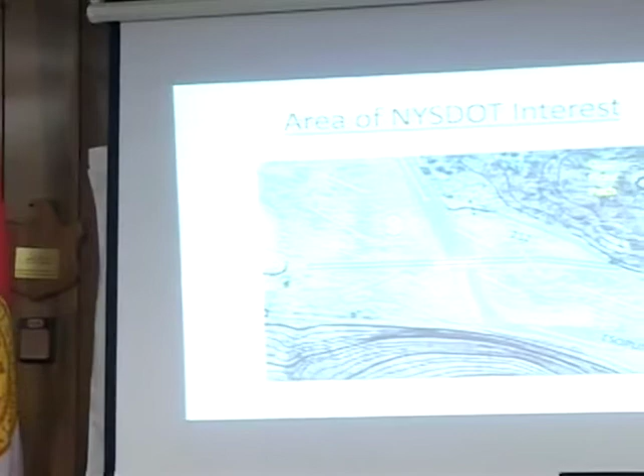So of course, the state is most concerned about the bridge location here. 212 is over here, and the flood control berm is shown in orange, and that's the floodplain map in the hatched area. And at these high flow events, instead of flowing with the river, a lot of the floodplain flows over the berm and over the approach, causing significant damage.

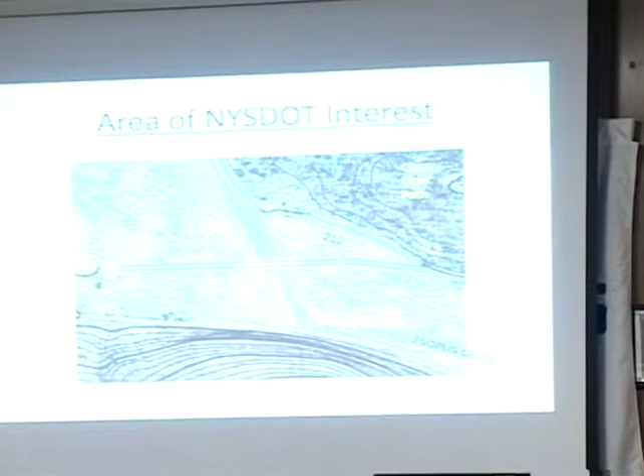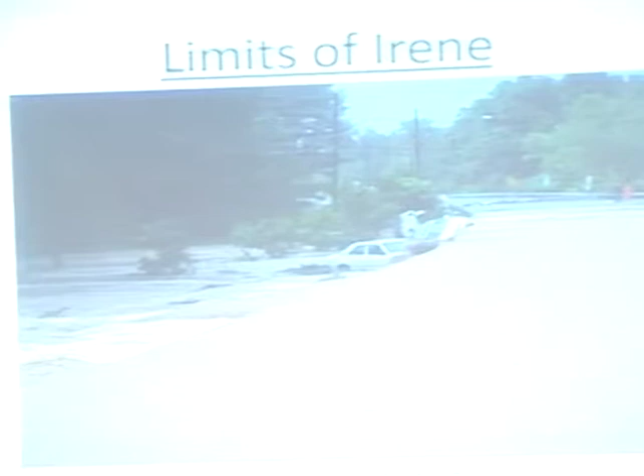During Irene, this is looking towards the bridge from 28 near the cabins property, a little further away from the farm stand. A lot of these pictures were supplied by Aaron Bennett, if you heard. This is looking towards 28 from 212 near the post office.

Looking at the bridge after the peak flow from upstream. Some of these are auto slides apparently. This is an aerial that shows a lot of the devastation up and down.

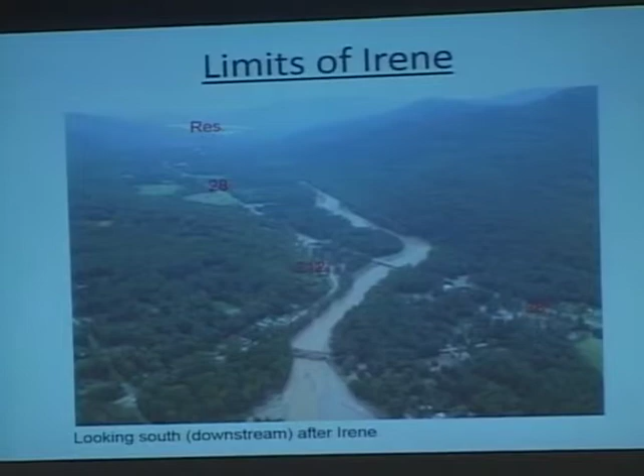Including, and these pictures were all used to help calibrate the hydraulic models. Basically, where there was mud, we knew the water was. And again, looking at the bridge after cleanup and the heavy debris load that was in the creek.

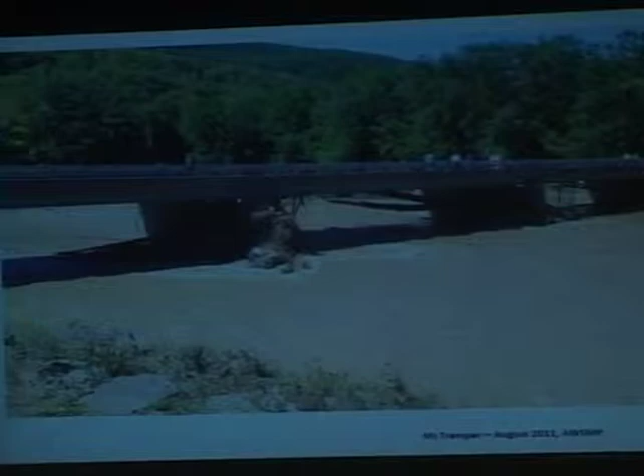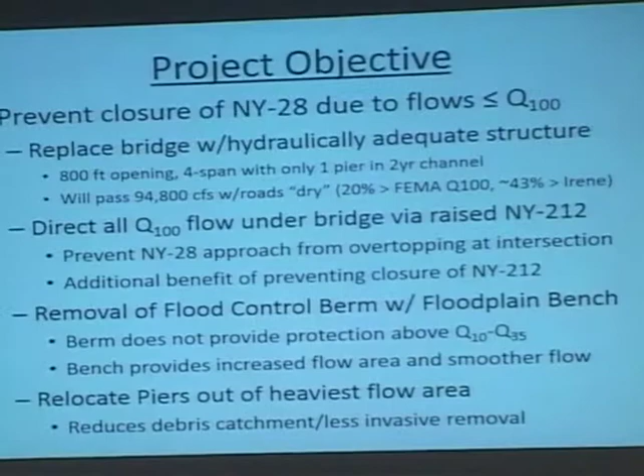So the project objectives, the simplest objective is to keep the bridge and Route 28 open during these high flow events, because it's a critical corridor for people living up in the area to get to and from emergency services. Get the services up there, get down to the Kingston, to the hospital, that sort of thing.

We're going to do that by replacing the bridge with a hydraulically adequate structure, which will be about 800 feet long. It will also have 3 piers, but only one will be in the river channel, located furthest away from where the berm is now, where the flows are slower and there's less debris.

In order to help keep 28 open, we can't have the water spilling onto 212 anymore, because it will still keep coming over the 28 approach. So we're actually going to lift up 212 significantly to impound the water and force it to go under the bridge.

In doing so, that renders the flood berm, which is not adequate for the 100-year storm, somewhat irrelevant. So in order to raise 212, we're going to remove the flood berm and over-excavate the area and use that material to lift up 212.

A lot of the suggestions came from the local flood analysis that was done for the town by Milone & MacBroom, including the over-excavation.

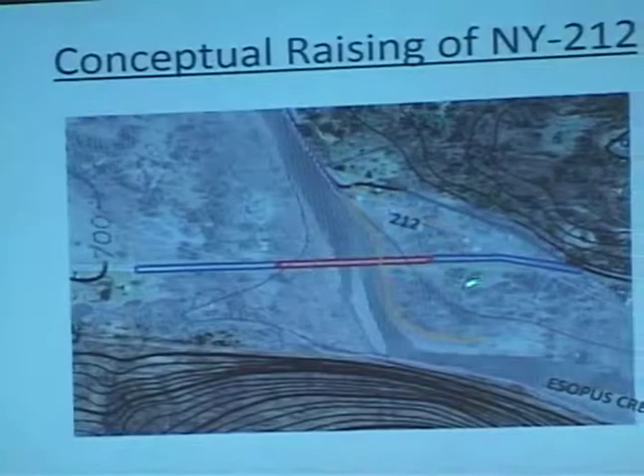So here's the concept raising of 212 and the removal of the flood berm with the wider bridge opening shown. As Rob said, the bridge actually will be just to the downstream of it, not on top.

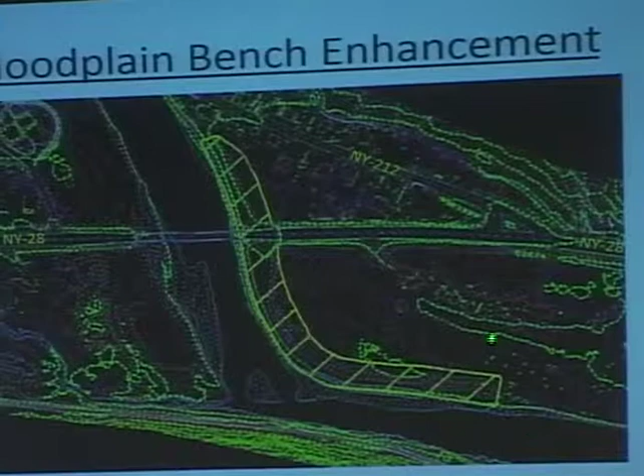Again, here's a view of the berm upstream and downstream. And we're going to remove that all and over-excavate about 200 feet to allow both a higher flow area and less impediments by the removal of the trees, so the water can flow through more smoothly.

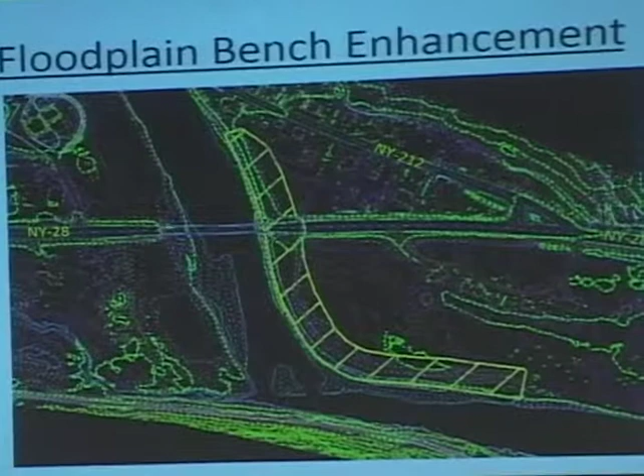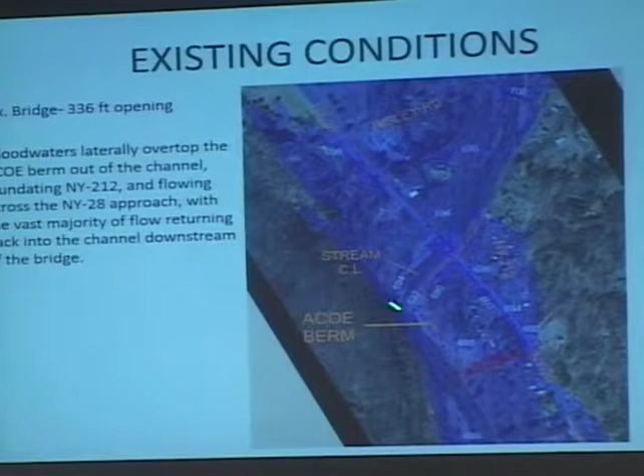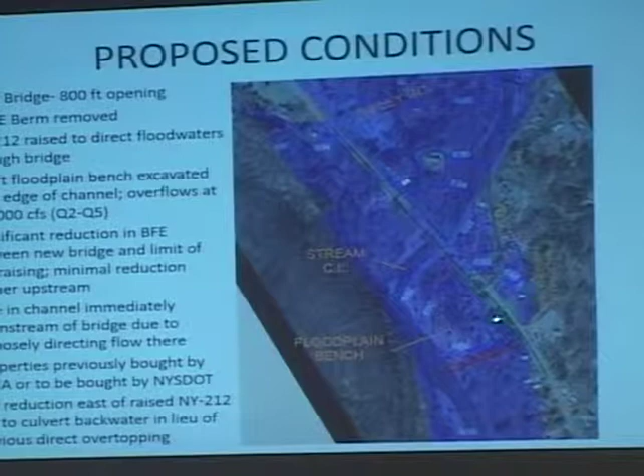Just an outline of the water inundation on the existing condition 100-year storm event with the Army Corps berm shown. And the proposed condition, you can see the new road alignments will actually be out of the flood zone. There will be, whether the culvert remains in this location or is moved over here, there will be some backwater inundation through the culvert. That area will have water about 6 feet lower than the water currently is during storm events.

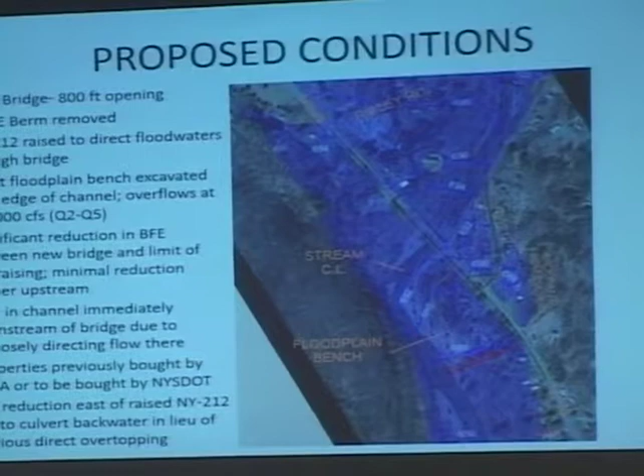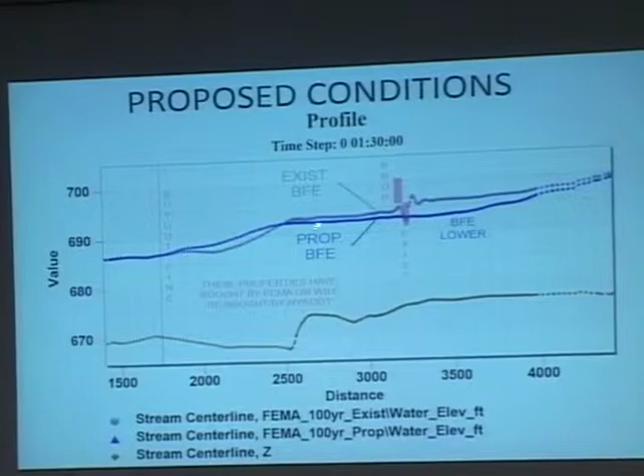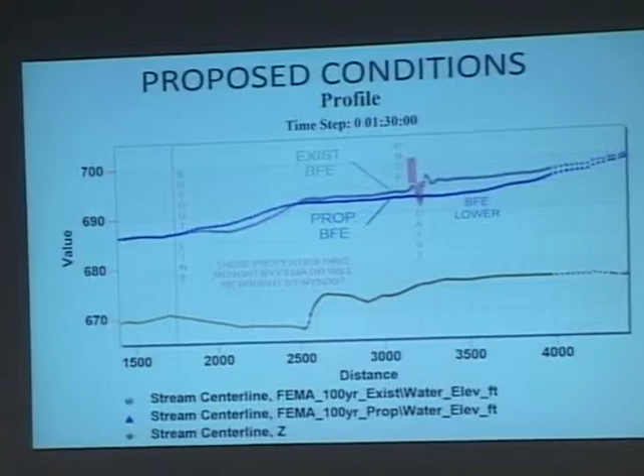You can see that the proposed condition flood elevation is much smoother through the bridge and much lower for that 850-foot zone upstream. There is some change downstream because we're forcing the water now to stay in the channel, whereas before it was leaving the channel. And so this is the area that DOT is concerned about by adding to the flooding issues there, and is part of the reason why the DOT will be taking some of the property.

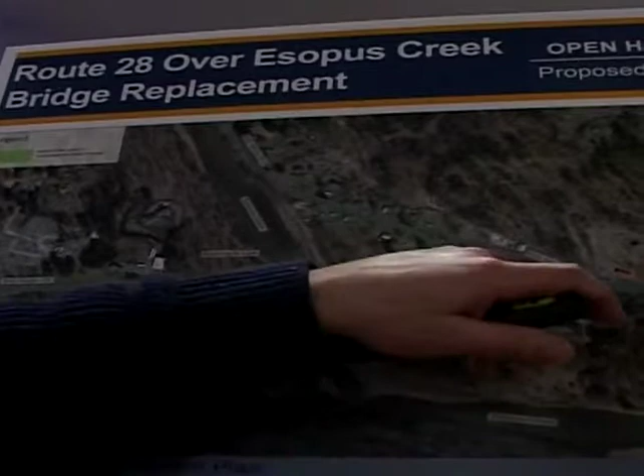So this access will be over the driveway, and then moving that pavement, they shouldn't be on that side, they should be on the other side. That's this side. You would add more to that, but how's that going to affect egress into the property? The driveway will be a hill coming down, but there will be a driveway access. Is that John's? That's John's thing, and this is me right here.

Grab Kristen. There's no issue with eminent domain in this area, because we're actually building on the other side of the road from here.

So we're just going to tie it in, and then whatever the property line is on this side, we can stay in front. So this is actually the property line, so that's going to stay the same. On that side of the blue, north is Golden Grove.

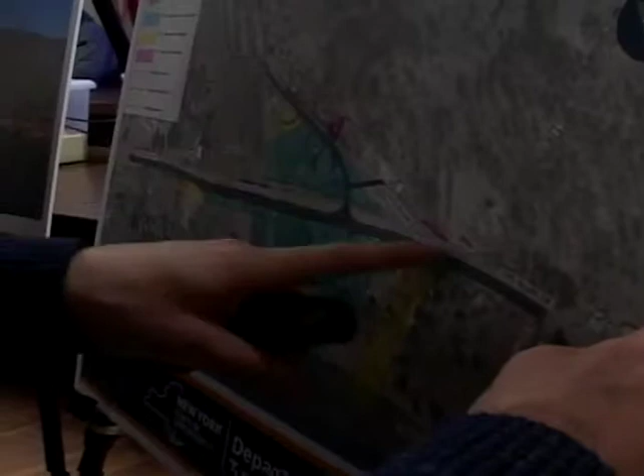So yes, they're either bought by DEP or NYSDOT. Some of the other stuff, so the permanent easement, we were going to replace the culvert and realign the ditch here, but I think we might be doing it here now for upstream purposes.

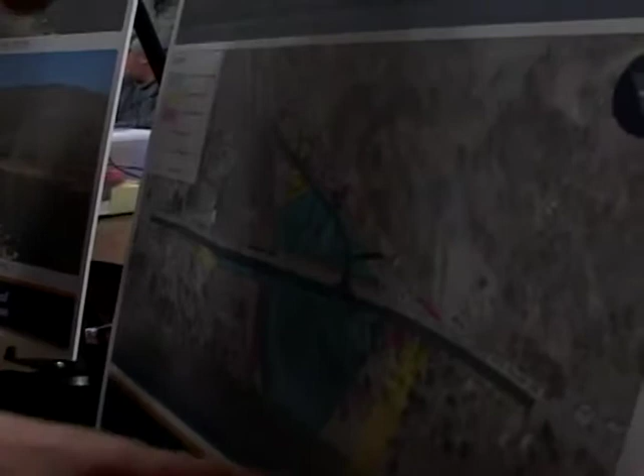The ones on this property that was previously bought by FEMA, they're already removed. On this property, we're going to be buying it and paying whatever.

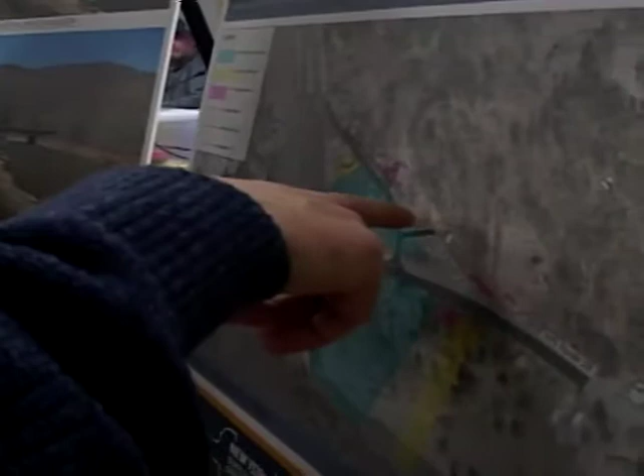Just in terms of what that line would say, if this is her property, that doesn't seem right, I don't see it. I still need to look at this.

So on this, you can see how the berm is mounted up. Just individually, addition is kind of right here. It's on the screen.

What is the time? The bridge will be starting to get built probably about a year from now. We usually give them 2 years, but that doesn't mean that it'll take - you might expect the 212 plan to happen maybe 2 years from now, so they'll be done with the demo by the end of 2020.

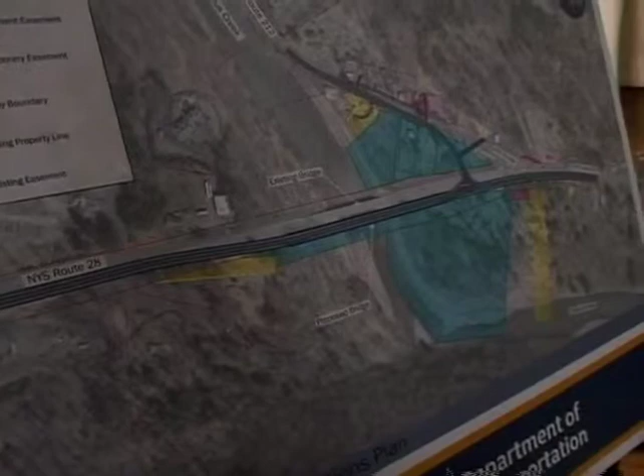Well, I lived in this whole area. There are people who think that was a low risk and it was more like it was way 20 more, or higher. Yeah, I can only go with the data that's given me from USGS and FEMA.

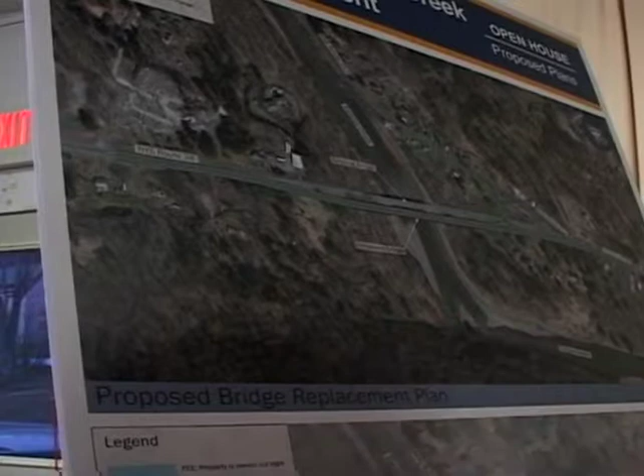But I'm not disagreeing. So here, you see this neighborhood here has a pond - it's a man-made pond. But you see this little stream, it comes off the mountain. There are several streams that come off the mountain, under the railroad, and then it winds down to the Esopus. So by the time it gets down there, it looks pretty big. It's significant, and I know that the trout do come upstream and spawn.

When it rains - yeah, I don't think... I understand that you can't dam the stream without a permit. Right, and that's not something that the DOT gets involved in. I definitely understand your concern. Yeah, my problem is from the DEP - nobody has addressed this issue, and unfortunately the DOT can't really do anything except for where it crosses the road. I can't tell a private property.

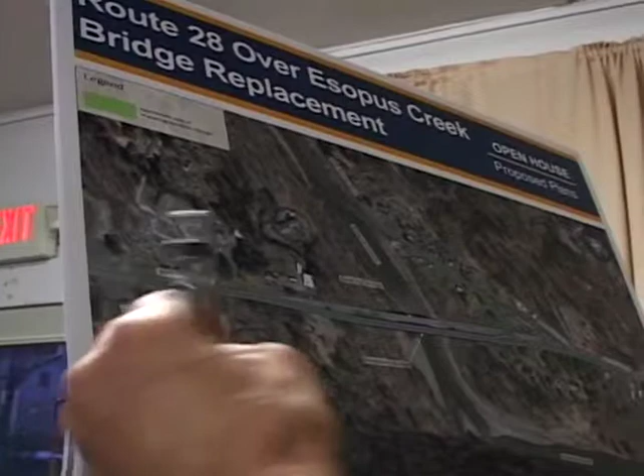Okay, now I would say that the DOT is also contributing to the problem that I have, because when this culvert was built, they put - so it would be up here somewhere - and they put the culvert underground, and not on the soccer field side that's all level, but they put a drainage ditch through there, but that drainage ditch, the walls of it go abut right up to their slope. So again, they're further causing a problem by not letting that drainage field.